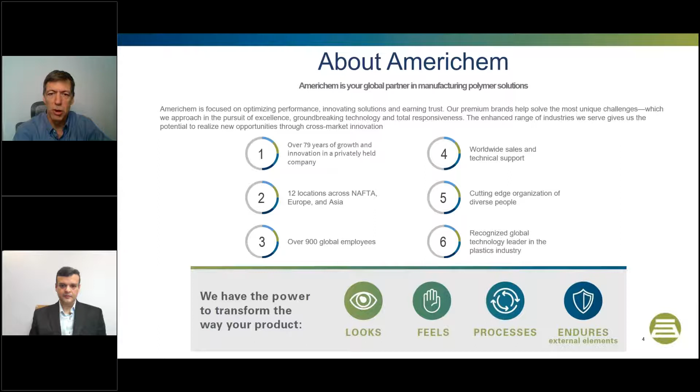Kumar? Hello everyone, and welcome to the webinar. My name is Kumar Parimal, and I'm the Product Development Manager for Engineering Compound business at Americhem. I've been with the company for about 2 years now, and I've served the plastic industry for 10 years, working in different R&D roles. And I want to continue with the introduction slide, more focusing on the R&D side.

At Americhem, our goal is to work with customers to provide them customized solutions for their needs, irrespective of the business size. And we can do that because of our very diverse portfolio of products. In that regard, we are truly a resin agnostic company. And to achieve these goals, we have a very strong R&D facility. We have R&D centers located across 3 continents. The labs are fully equipped to run all kinds of physical, mechanical, and analytical tests. And we also work with external labs for specific tests that customers need.

As I mentioned earlier, at Americhem we want to work with our customers closely to find a customized solution for their need. We understand that one size does not fit all. And to achieve these goals, we have very strong field service support, and our field team is not just the sales team. They are very technically strong people who work with customers to recommend the right material for their applications. They work with customers to find the right processing conditions for our material and help them to design new applications and tool designs.

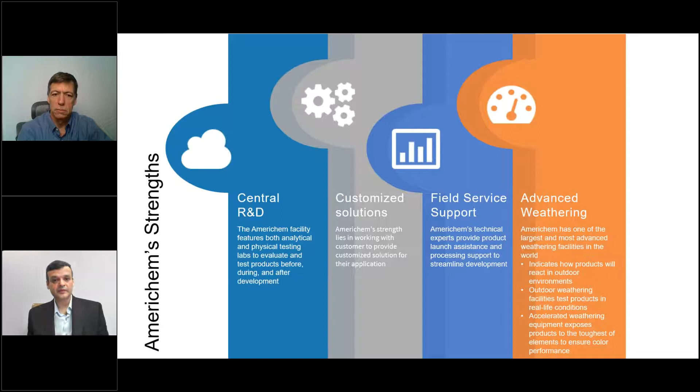And last but not least, one of the topics for today's seminar is weathering. We have one of the largest and most advanced weathering facilities in the world, and I'll talk a little bit more about the lab capabilities on the next slide. You can see our labs, we have both ISO 9001 as well as IATF 16949 certified labs. We have over 30 years of industry experience in the world of color and aesthetics. And we have a very strong R&D team who is proactive about all the new emerging technologies. We are fully aware of the work going on in this area of aesthetics and colors.

In the lab, we can perform over 30 standard test methods for weathering, as well as a lot of customized tests that we work with customers on to meet their specific needs. And one more thing that I want to mention is that we do have access to outdoor weathering sites both in Florida and Arizona.

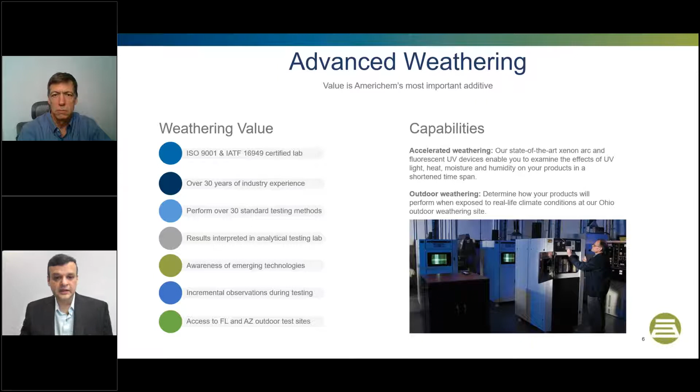So keeping all these strengths in mind, I want to answer one of the key questions for today's seminar, which is why do we need weathering? And there is a lot of value in the weathering performance. On the next slide, you can see the picture on the right; it's a simple picture that everyone can correlate with. You're on a nice summer day, you spend a couple of hours on a beach, and you see discoloration on your skin. And this tanning shows how intense and how harmful sun rays can be. And we are talking about just a couple of hours.

Now think about your end users and customers who have their favorite ATV or a golf cart or a snowmobile, and these NAVs are intended for external use for a longer period of time. So they want them to look nice throughout their life. And in a certain way, nature is way advanced. We know that you spend the next few days inside and your tanning goes away, the skin self-heals. But in the polymer world, we are not that advanced yet to find a self-healing colorant or self-healing polymer. So we have to come up with an alternate solution.

And the solution that we work on is to design our product, formulate our product in a way that it does not discolor, does not degrade, it's more stable over a period of time, so that we don't have to run into this issue of discoloration. And again, as I was mentioning, nature is pretty harsh. We have a lot of sunshine. And when you think about your applications, your end user has this application throughout the world, and you don't have to test your material in every single weathering condition.

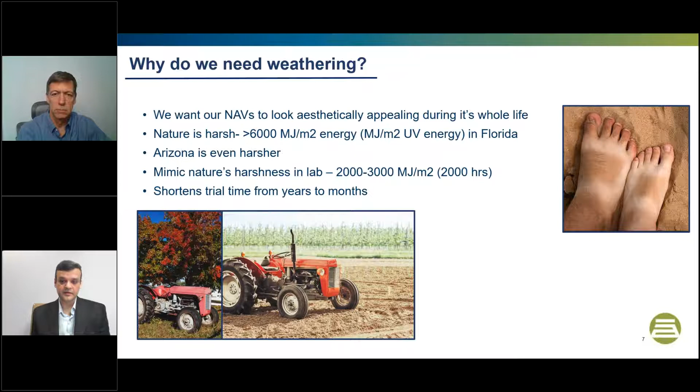Our NAV category, when we talk about NAV, we really refer to all types of land or water-based moving vehicles outside of conventional automobiles. The types of vehicles include outdoor sport and recreation: snowmobiles, marine, boats and jet skis, golf carts, ATVs, side-by-side all-terrain vehicles; lawn and garden: mowers, lawn tractors, utility carts; and agricultural heavy equipment: tractors, harvesters, balers, earth-moving equipment, etc. And in this area, the applications include fenders, hoods, skirts, consoles, body panels, etc. Generally parts that influence or enhance the outward appearance of the vehicle, as well as perform a specific function. So the requirements on these parts include both aesthetics and durability.

Appearance sells, and in NAV, the color is often the brand, as everyone can relate to John Deere green. The long-term outdoor performance of the color, its appearance, and its durability are a reflection on the OEM and speak to its quality. So initial and long-term appearance are critical to this OEM perception.

Not only do they have to look good, they have to perform. And typically these vehicles are expected to endure harsh outdoor environments of water, snow, mud and dirt, chemicals, etc., for the life of the vehicle. So toughness, even at low temperature extremes, durability, scratch resistance, and chemical resistance are all key requirements in this segment.

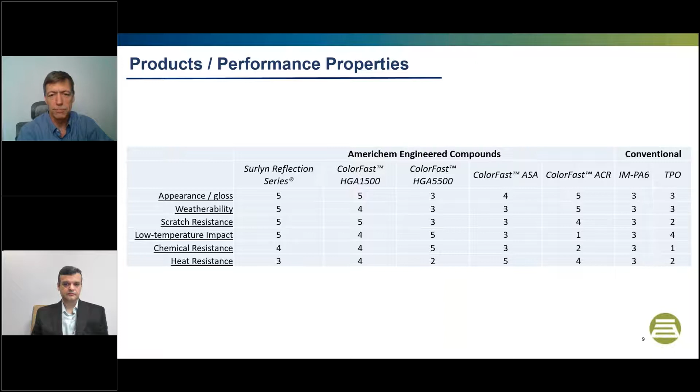So if we look at a couple of case studies on where we've been effective, first is a hood and forward cowling on an industry-leading brand snowmobile. The customer was experiencing breakage at low temperature and looking to reduce costs by eliminating the need to paint. Surlyn Reflection Series was positioned. It demonstrated ductile impact performance at -30 degrees C, eliminating all breakage that they were experiencing. It demonstrated a high gloss Class A finish directly from an A1 polished mold.

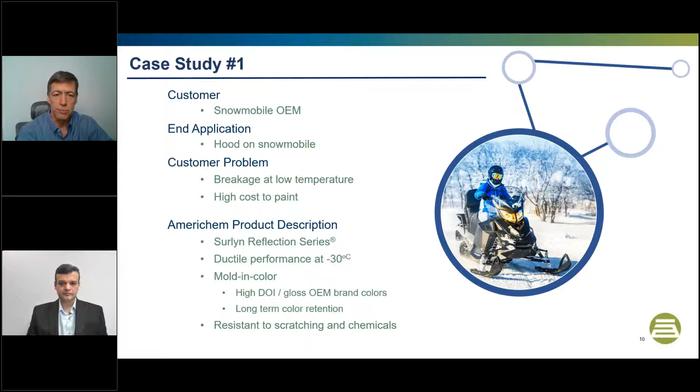It met the OEM specific weathering test requirements across their full color range. We proved to be highly scratch resistant and resistant to the operating chemicals, including fuels in the fuel tank area. And they were able to achieve a savings of $80 per part.

Second one is an industry-leading golf cart, the full front and rear body panels. The customer had poor prior experience with attempts at mold-in-color. Appearance, scratch, toughness, and weathering were all insufficient, but they were still looking for an alternative to painted parts. Americhem successfully positioned our Surlyn Reflection Series material here.

We successfully color matched their full product range, again with a high DOI, high gloss appearance, and we were able to meet all of their long-term weathering requirements as well. Obviously, high sun loads on golf courses in Arizona and Florida. We had ductile impact performance over the vehicle's operating temperature range and were highly resistant to scratching and the environmental chemicals and cleaners as well.

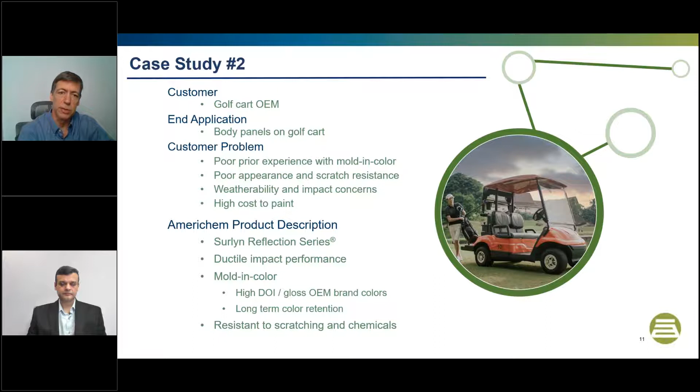The next one is a major OEM. It was an outboard engine. The client was launching a redesigned engine, and they were looking to address deficiencies of chemical resistance and reduce costs with their prior painted primary engine cover panels. In this case, we positioned our ASA material. We had a successful color match on multiple colors, including a challenging bright white.

We demonstrated chemical resistance to the oils and fuels and gasketing materials used in the engine construction. We were again able to achieve a high DOI, high gloss finish, and the long-term appearance was qualified to the customer's accelerated xenon testing method. And then finally, the ASA material provided the needed heat resistance to withstand the summer sun heat load.

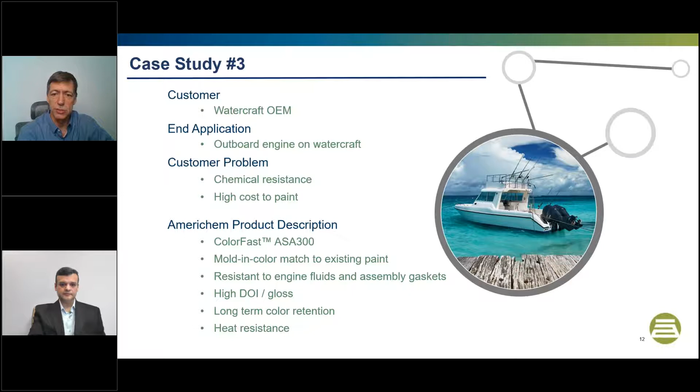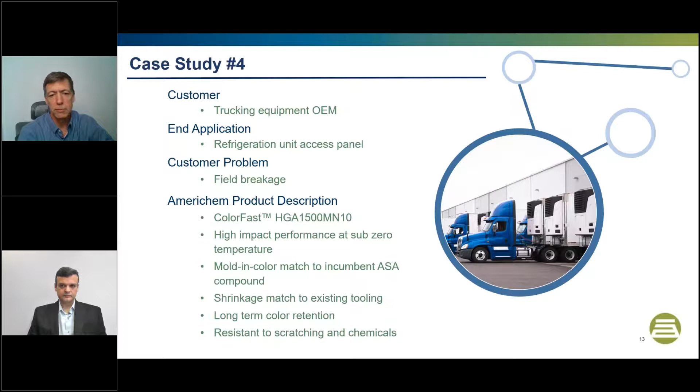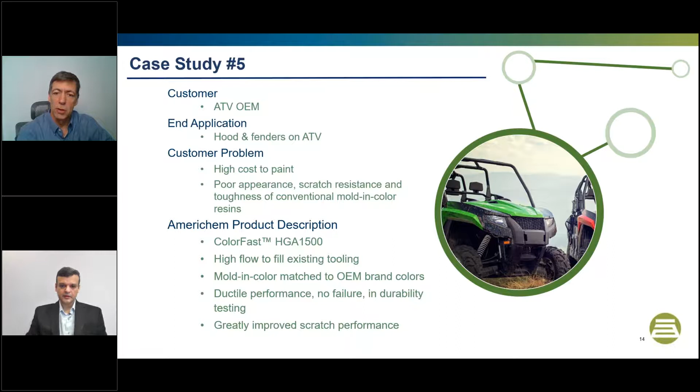Demonstrated durable ductile performance in demanding off-road testing. Displayed excellent resistance to scratches and chemicals. And additional high flow of our HGA 1500 was able to fill the large area of the hood. So again, a nice success story. I'll go back to Parimal now for a little more in-depth look on our weathering performance of these compounds.

When you are doing weathering, you do expect some shift, but the question is what shift or what change is acceptable. And it's a case by case study. In some darker colors, a delta E of 1 might not make any difference, but for some colors, a delta E of 1 might make a big difference. So it's a case-by-case study, but in general, a delta E shift of 3 units is an acceptable shift in color when we are talking about weathering by the industry standard.

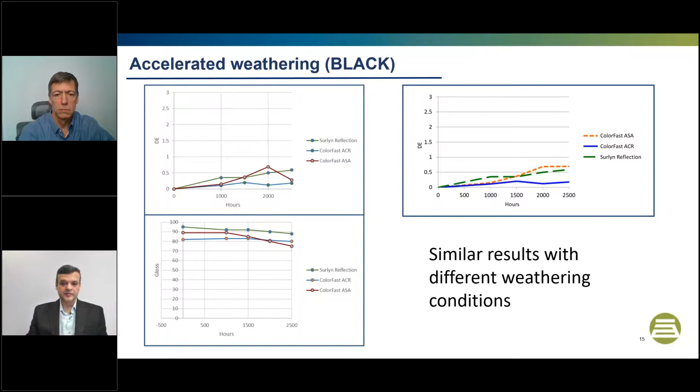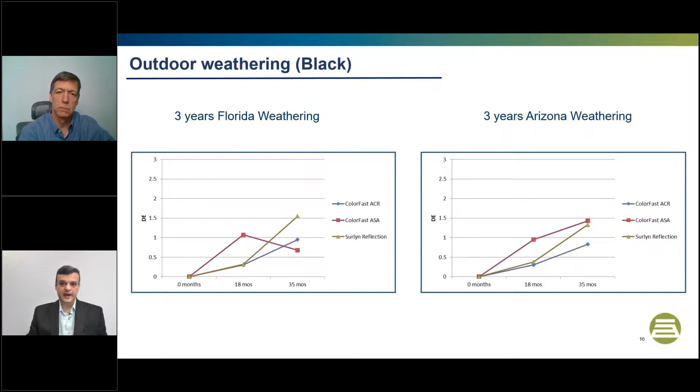And with that, I will hand it over to Don to conclude the seminar.

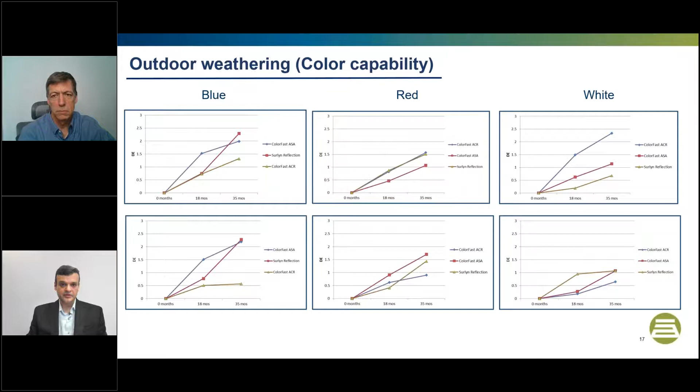Our first question is, what if I have more specifications other than weatherability for my application? Can you manufacture compounds that meet multiple needs such as UV and chemical resistance or flame retardants, etc.? Yeah, I'll take that one. And of course, yes, we do.

We very often work directly with a customer or an OEM and tailor products to meet their needs. We've got specific data, obviously, on the resins that we've talked about today, many of which would cover the questions that you've asked about. We, of course, are excellent in flame retardant technology, so we can add FR. And it's very common to develop a custom formulation to meet the needs of the application. What we ask for is key performance criteria, and we'll take that and work with our technical group to assign and develop the product.

Okay, our next question here is, can you tell me more about your HGA product line you mentioned? Our HGA product line is our proprietary modified polymers. We use our own modifier technology, and essentially we modify materials such as the polyethylene and the polyamide 6 that was referenced today. We can possibly do that with others as well, customized nature for the needs of the application.